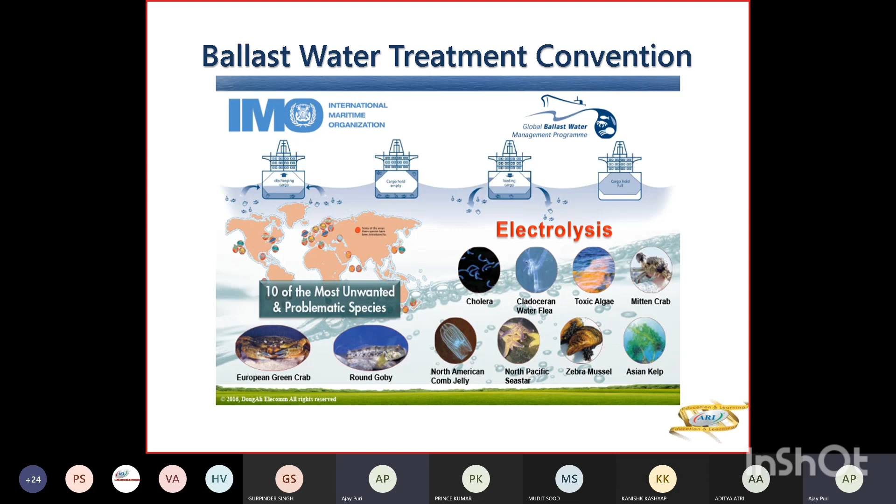Now, 10 billion tons of ballast water is being exchanged with chemicals, invasive species, and 10 billion gallons of sewage is discharged annually, and 3.25 million metric tons of oil is annually discharged, and so many millions. So the water of the sea is getting polluted all the time, and we have control of sewage by Annex 4, we had control of oil by Annex 1, chemicals by Annex 2. So what about the ballast? That's why the Ballast Water Treatment Convention came up.

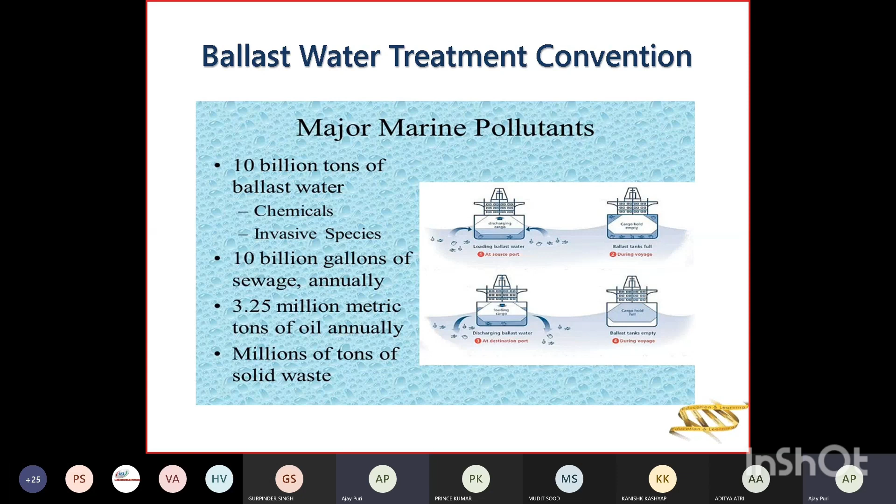So ballast water, why you require it? You require it for your trim and stability because you're discharging. So you are pretty light. So for better stability, you have to take ballast. And then if your trim is too high, maybe 5 meters, then you have to take ballast. So your ballast will have water, stones, and sediments and living organisms coming through the suction pipe.

And about 12 billion tons of ballast water is transported annually. The ships carry about 1 lakh to 100 lakh gallons of ballast water. So with this ballast water being carried, about 7,000 plus marine species are transported daily from one place to the other place. And every 9 weeks, a new species is introduced in the world.

Now, Great Lakes are 5 lakes in Canada and US. They are made of fresh water. And you enter the Great Lakes through Montreal by various locks, about 12 to 13 locks are there. So the ships which go there normally, the normal vessels which are there are known as lakers.

So about 160 plus non-native species have entered Great Lakes, and they are destroying the ecosystem there. And 5 billion estimated economic impact is of zebra mussels over the next decade. So you can understand what is the outcome of these ballast water organisms which are creating worldwide.

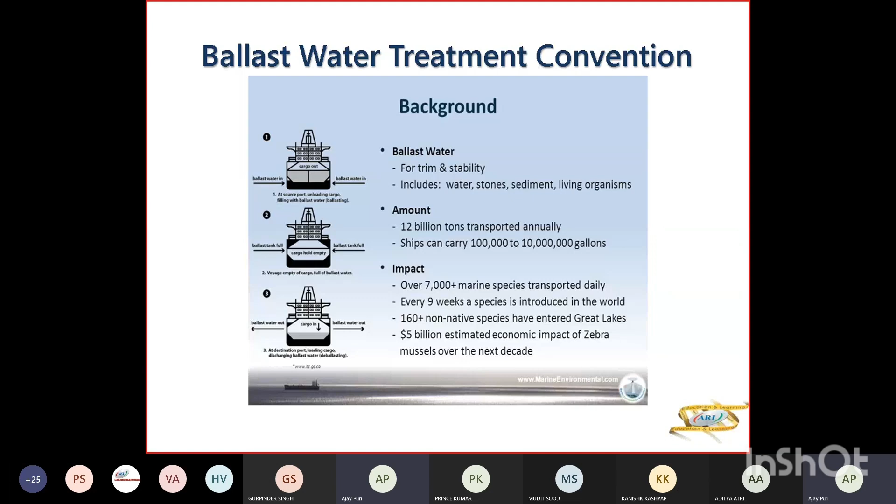So you had a D1 convention. The D1 standards were to exchange the ballast water in the open seas away from your coastal areas. So 95% of the organisms were changed. But what about the 5%? So the D2 convention came up. There's the D1 standard of exchange. The D2 standards have to be complied by 8 September 2024. All ships.

So the D2 standards were specifying the maximum amount of viable organisms, not visible, viable, because you can see only in microscope. Viable means living, which can be discharged. Beyond that, you have to do the treatment. So within the treatment, the number of cholera bacteria, enterococci bacteria, those standards are given there. So all new ships must conform to the D2 standard.

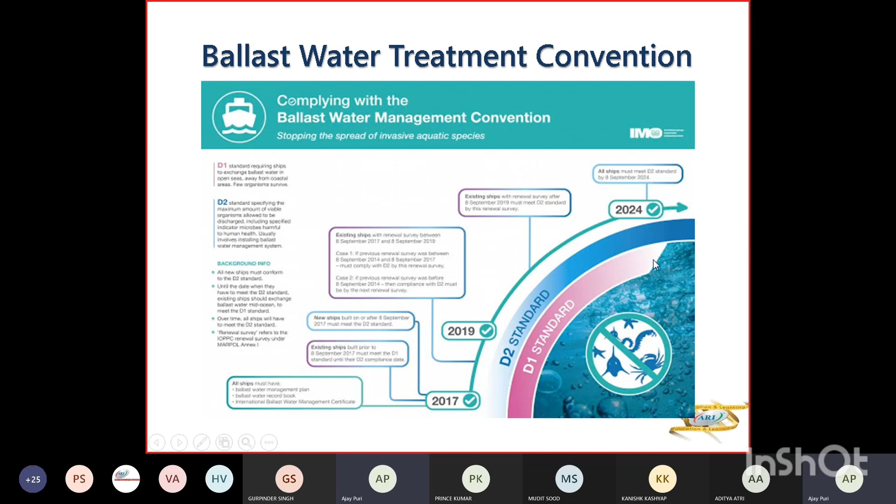Now, in order to reduce your damage from aquatic invasive species, what are invasive species? That means they enter that area, destroy the ecosystem there, destroy the fishes there, and invade the territory. You know that there is a saying that every dog in the street is like a tiger. So if any other dog tries to go into that territory, the dog in this area is going to bark him away.

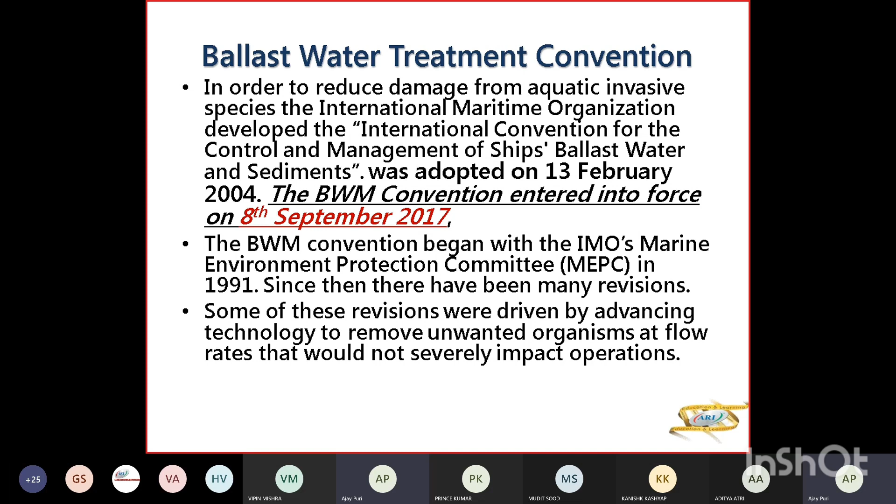So IMO approved Marine Environment Protection Committee, जो MEPC है, approved a resolution containing a revised implementation scheme so that they comply with the D2 biological standards.

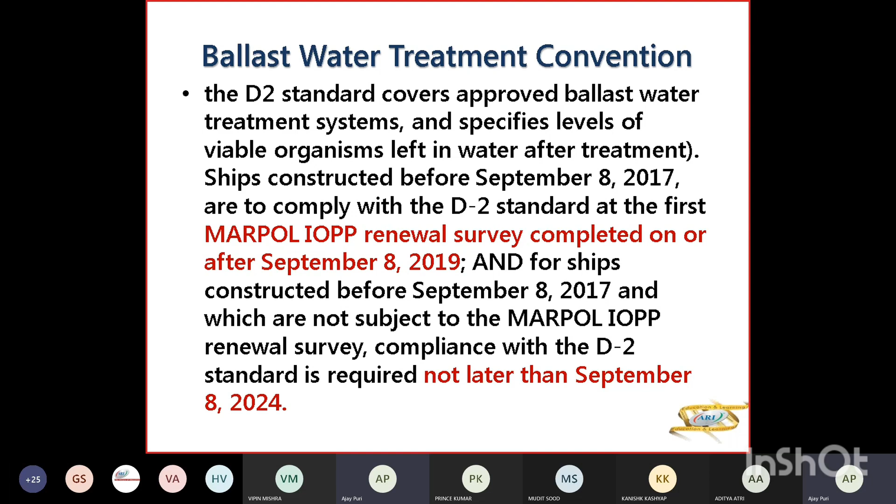So new ships must comply with D2 standard. New ship means built on or after 8 September 2017, and they have to conduct ballast water management that meets the D2 standard from the date the ship is put into service.

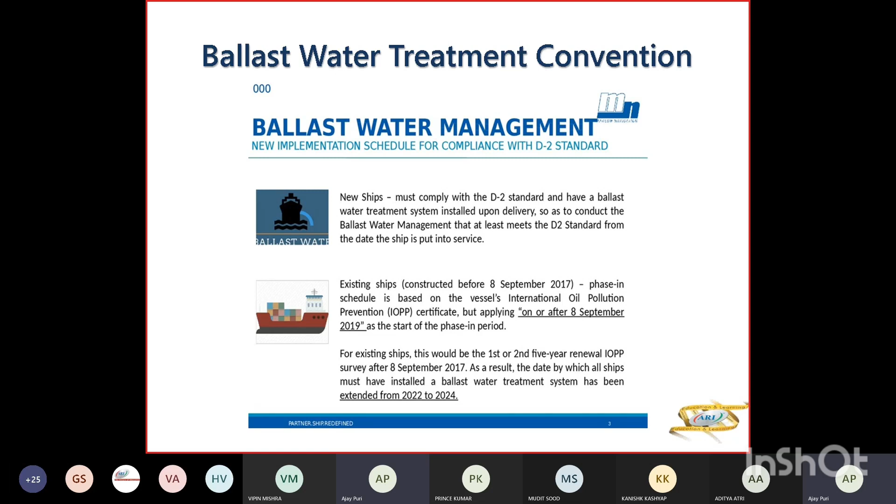So for existing ships, this would be first or second renewal survey after 8 September 2017, and the date for all ships has been extended from 2022 to 2024. So finally all ships have to have, by 8 September 2024, the ballast water treatment that is D2 standard.

D1 standard you already know. D2 standard specifies the amount of viable organisms discharge, including the specified indicator microbes harmful to human health.

These are usually installing ballast water management systems.

About 7000 species come daily, every hour, into ballast water, and this is affecting 2.4 billion people, and one new species is introduced every 9 weeks into an area, and 80% of world trade is carried by ships.

So this tells you that all ships must meet D2 standard by 8 September 2024, and all ships, as per the ballast water convention, must have a ballast water management plan, a ballast water record book, and an international ballast water management certificate.

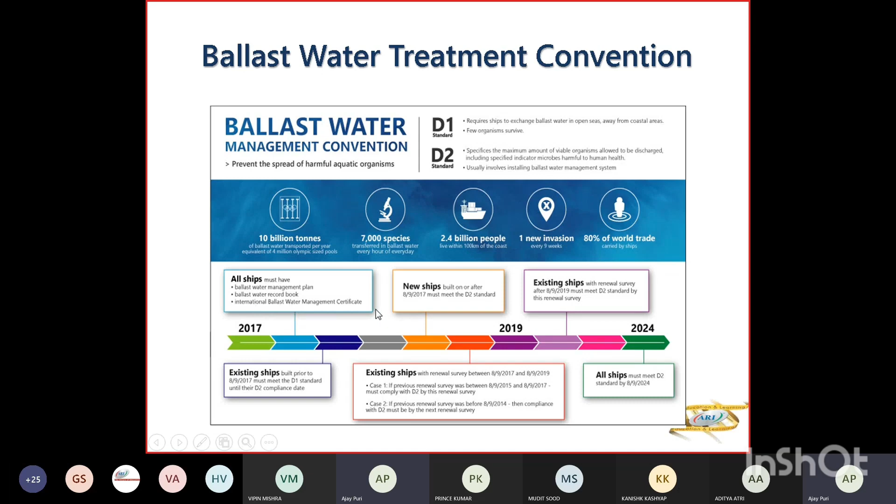So what is your D1 standard? D1 standard is basically ballast water exchange.

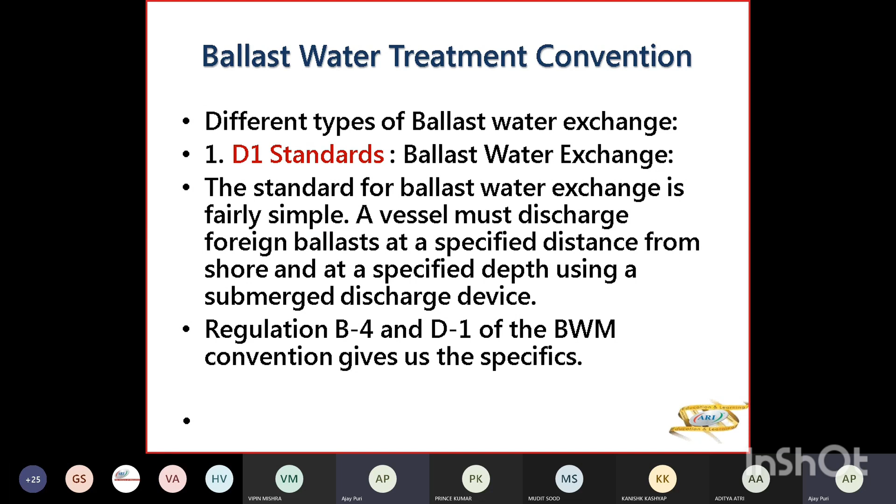You have to discharge ballast at a specified distance from shore at a specified depth, and for this, your exchange should be either done in mid ocean or at least 200 nautical miles from shore, and at this location, the depth of water should be 200 meters or more.

Now, when your exchange is there, it should be at least 95% of the volume, and it should be repeated 3 times. And the vessels must demonstrate high efficiency exchange to reduce the number of exchange cycles.

Ballast water exchange should be taken only when weather is good, because you can't do it in rough weather. Otherwise the safety for the crew will be lost. You can't keep the crew in danger if you are doing ballast water exchange.

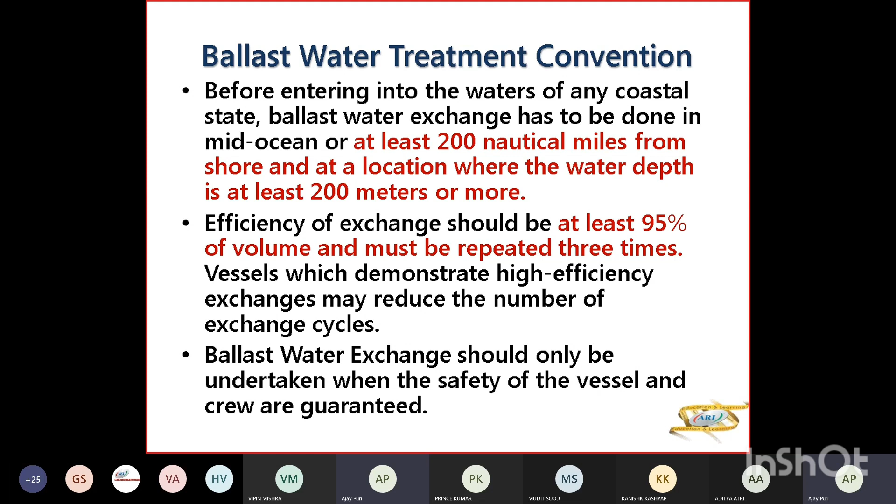But suppose this scenario of 200 nautical miles, 200 meter depth, is not possible. Then you can ask the port state to advise which area they designate for exchange.

And when you're having this kind of exchange, the port state should not deviate or delay the ship. They should not say you go 500 nautical miles here and then discharge. They should not delay and cause a deviation for the ship.

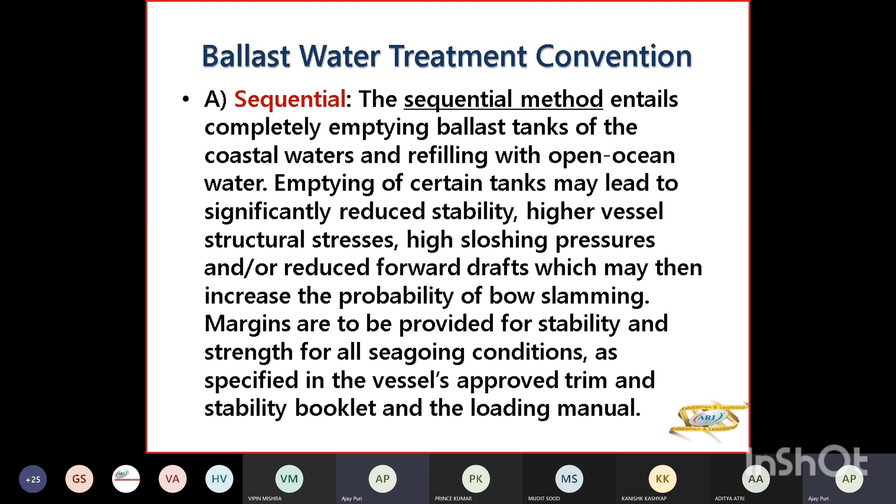When you reduce forward draft, it will increase your bow slamming and pounding. So margin has to be provided for stability and strength for all seagoing conditions, as per approved trim and stability booklet, loading manual, and load indicator. You cannot exceed your stresses in any condition.

Sequential is discharge and refilling of your tanks. Flow through method is filling and overflow, that is you are filling the tank from below and overflowing from the top. Dilution method is pumping out water from below and putting water in the tank from top with hoses.

So one is your sequential method where you're completely discharging and then completely filling your tanks, which is the most dangerous one. Most precautions need to be kept there.

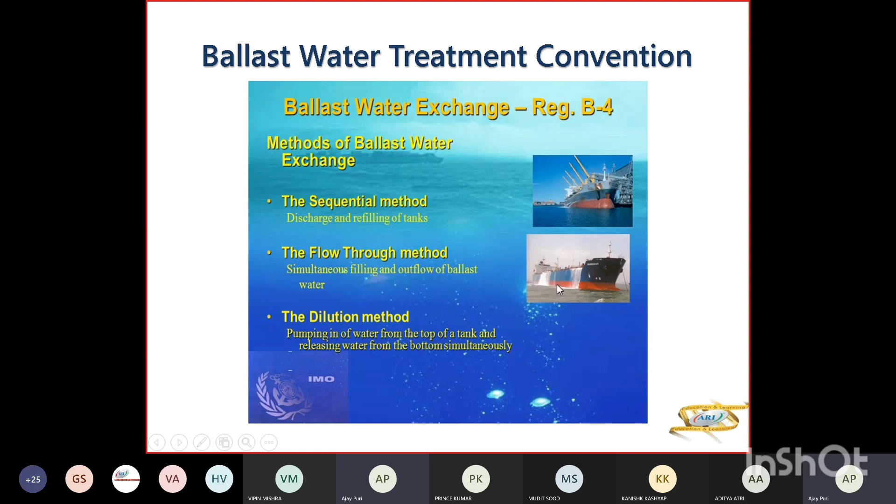Flow through method is the one you see in the photograph here. You're filling up your ballast tank, taking suction from below, and overflowing your tanks by 3 times the volume of your tank. Dilution method is not overflowing; you're taking the water in the tank from top and pumping out from below at the same rate.

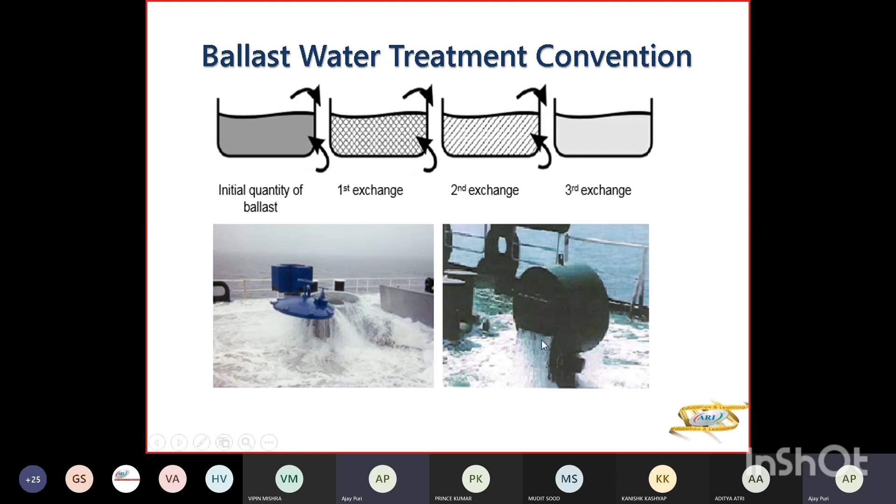So this is your overflow method, which you normally do on your ships, or flow through method.

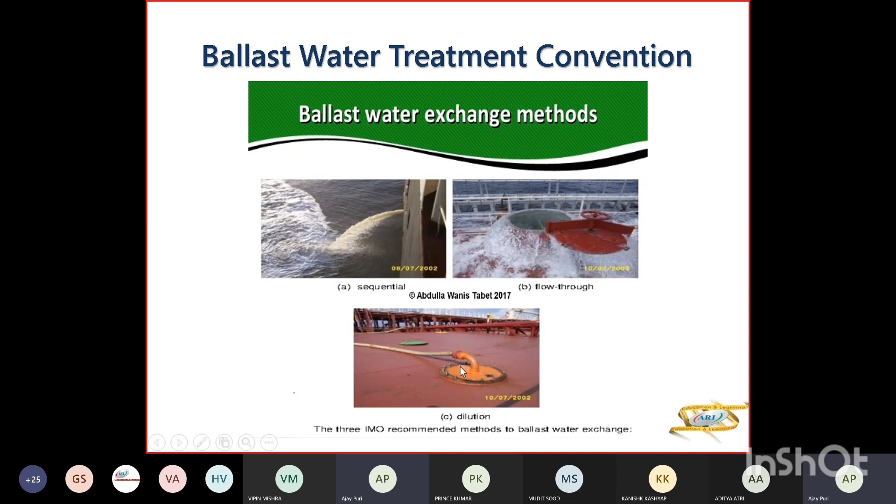This is the flow through method. This is your sequential method, you are pumping out and then pumping in. Flow through method is opening all your tank domes and overflowing from that. Dilution method is taking the water from top, pumping out from below. So you make adjustments on how to take the water from top, and the rate of taking in water and pumping out should be the same.

Now what are the disadvantages in this ballast water exchange? The operation is very laborious, a lot of people are involved, and you see here you're overflowing in very heavy seas, and it can break up your ship because the fatigue limit will be crossed and the ship can sink.

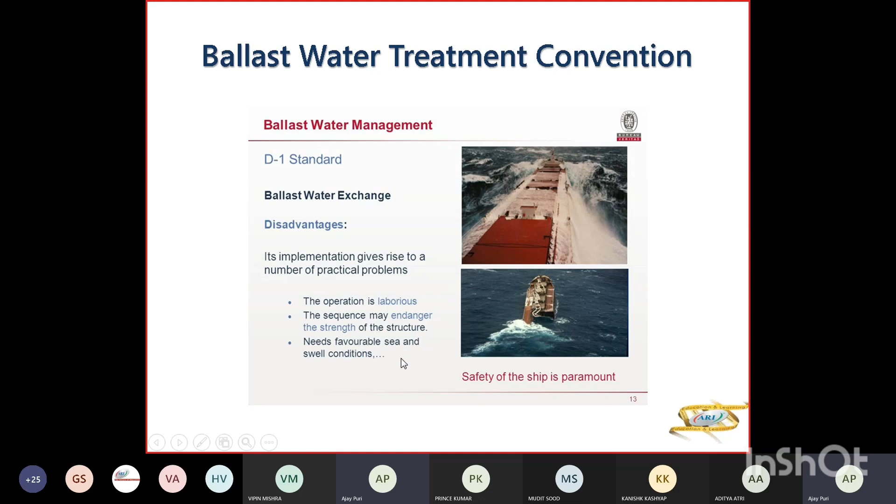So your safety limits have to be taken into consideration. The sequential method may endanger the strength of the structure and needs favorable sea and swell conditions. Otherwise, we should not do it.

Now this has come in your exams several times: what are the ballast water exchange precautions to be taken? Because you can't just start your ballast water exchange without considering all these things. First is avoidance of over-pressurizing or under-pressurizing your tank.

Whenever you over-pressurize the tank, that means you're overflowing it. The pressure on the tank, the water head on the tank, is creating a lot of pressure on the tank. So long-term effects on the strength will be known afterwards - cracks will appear there.

Number two is your free surface effects will have an effect on stability, and sloshing loads on your tank which are slack at any time. And whatever your admissible weather conditions are - are you going to have a storm like we had, severe tropical storm, extremely severe tropical storm, which hit Gujarat yesterday. In these kinds of conditions, you can't think about it because then you are going to lose your vessel and you will not be there.

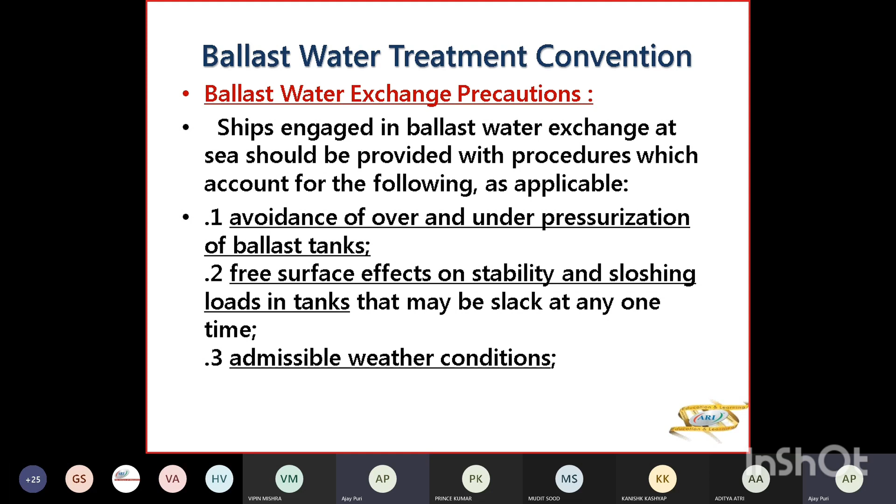Number four, you have to do weather routing in the areas affected by cyclones, typhoons, hurricanes, and heavy icing conditions, because here you can't have your ballast water exchange.

Number five, you have to maintain adequate intact stability as per approved trim and stability booklet.

Number six, your bending moment and shear limit should not be exceeded, or you should not have the stresses going beyond your limits. You have not to stretch your limits. So suppose there is a limit for your bending moment and shearing stress, you cannot exceed it. You have to be within the stress limits. So for that, if it is exceeding, then you have to stop.

For container ships, you have to see the torsional forces also because they can break away your containers. Then eighth is your maximum minimum forward and aft drafts - for your stability you have to maintain, you can't exceed those limits.

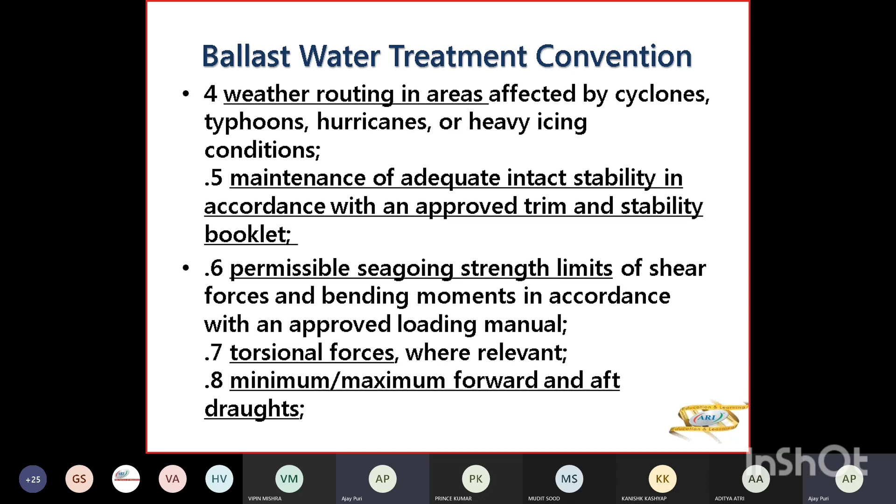Number nine, whenever there is a heavy wave, you will have a huge vibration on the hull, which we have covered in vibration stress. So there you have to see your wave-induced hull vibration does not exceed the limits to cause resonance.

Number 10, precaution: you have to maintain the records of ballasting and deballasting. How much time when you're starting, when you're stopping, how many times you're doing it - 3 times and all. That you have to monitor. The records have to be maintained.

11, contingency procedure for situations which may affect the ballast water exchange at sea. Like if you have very bad weather, or maybe a pump failure - you started and now you have a pump failure, now what will you do? Or suppose you've started off halfway through sequential exchange, now you have loss of power and the generator is conked off, now what to do? Because the ballast is half or maybe less than half, or you're completely empty, now you can't fill it in only. So what kind of contingency procedures or plan will you have for that, so that you can counter it?

Number 12 is the time for completing a ballast water exchange. So you have to see how much time it will take for completing your exchange.

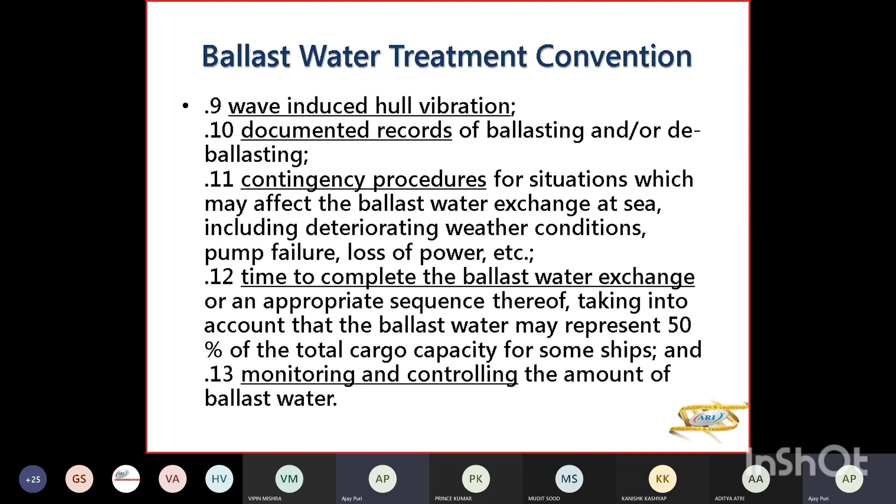So the first method we have already done, and these were the precautions for the first method.

Now flow through method involves pumping replacement ballast water into the bottom of the full ballast tank, forcing existing ballast water through the overflow or any other arrangement of flowing out.

In the trials, they have seen that overflowing once will not help out, because the organisms will be sticking to the underside of your deck. So they said, okay, by pumping out at least 3 times the volume of your tank, you will achieve 95% effectiveness in eliminating aquatic organisms. So 5% might remain, 95% will come out if you do it 3 times.

But in flow through, your stability will not be affected because you have the same amount of ballast water.

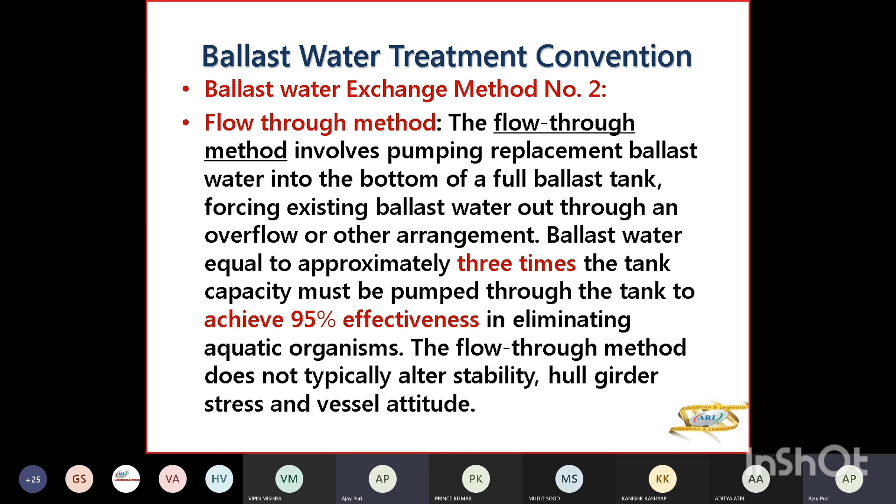So what are the precautions to be taken for number 2, the flow through method? In this, overpressurizing will be there in your tank. Your air pipes are not designed for continuous ballast water overflow because that is only for releasing air, not for water. So if you are continuing ballast water exchange for so many years, it might put a lot of pressure on the tank. Structural damage might occur in the long run.

Number 2, current research indicates that pumping at least 3 full volumes of tank capacity would be needed for effective exchange when filling clean water from the bottom and overflowing from the top - you will require 3 full exchanges for 95% effectiveness of removing aquatic organisms from your ballast water.

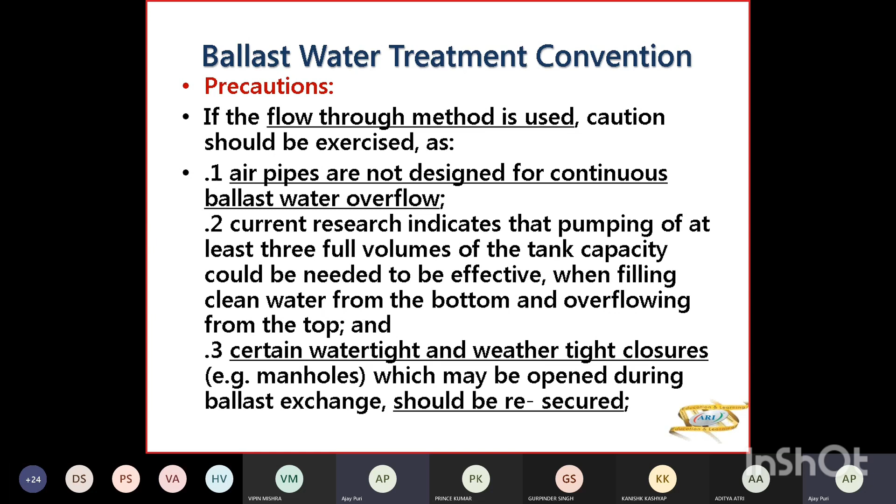Number 3, when you're opening all your watertight and weathertight closures, which are the manholes, for ballast water exchange, you have to close every one, all the manholes, otherwise you will have a problem. So you have to remember that you have to close all your manholes.

Then another thing is, when you're doing ballast water exchange, you'll have a lot of water on deck and somebody might slip. So your safety wires need to be rigged so that nobody falls on deck. Then you can have a problem of somebody falling inside an open manhole because there are a lot of open manholes on deck, so those safety precautions have to be taken. And if you're doing ballast water exchange at night, it might disturb your navigation also.

Then in freezing conditions, you should not do ballast water exchange unless absolutely necessary, because your air pipes and all might crack up, and you will have a lot of ice on deck because you're doing overflow. That ice is going to put a lot of stability issues, increasing your stability concerns because of the weight of ice accumulated on deck, so the stability might get affected.

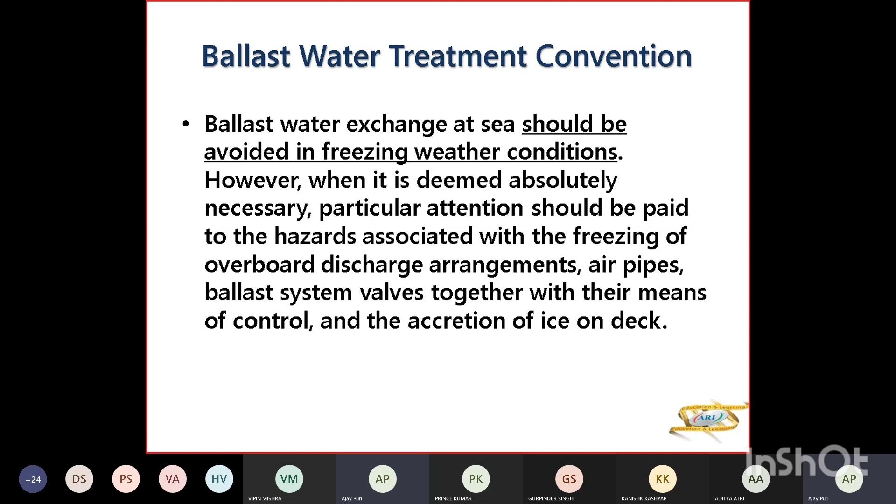Plus you have to fit load indicators to perform calculations of shear force and bending moments as induced by ballast water exchange at sea, and bring it below your permissible strength limits. You can't increase your fatigue limit at any time because that will crack your vessel.

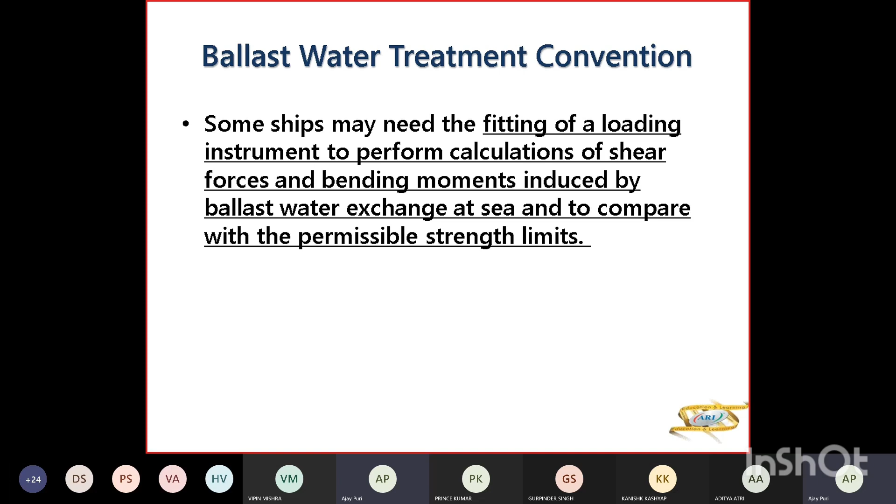Now we do number 3, that is the dilution method. In the dilution method, you are taking the ballast water from top, pumping out from below. This you have to do 3 times, 3 times of your tank volume, to achieve 95% effectiveness, and you have to see that the pumping rate inside the tank is the same as the pumping out rate, because you have to maintain a constant level in the tank. So you are filling from top, simultaneously discharging from bottom, maintaining constant level.

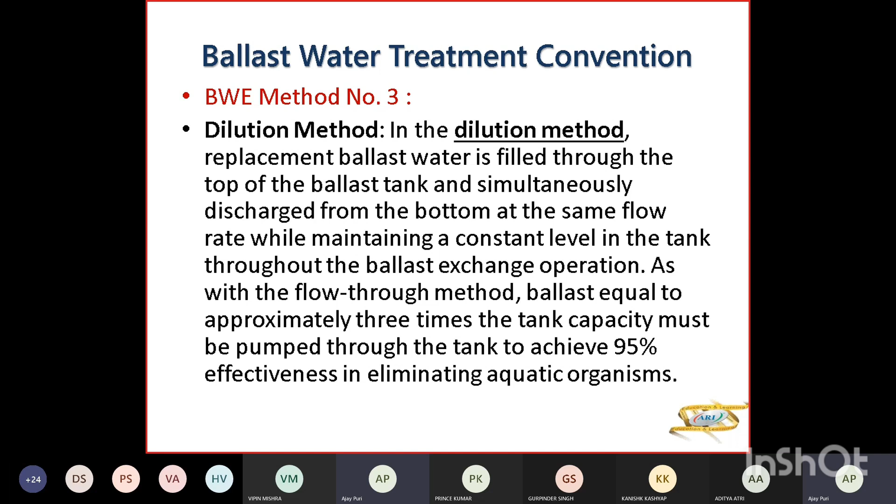And ballast equal to 3 times the tank capacity must be pumped through the tank to achieve 95% effectiveness in eliminating aquatic organisms. Now the dilution method has better advantages than the flow through method because you are not overflowing and putting pressure on your tank. So you're maintaining stability and strength, but the problem is you are using 2 pumps, not 1.

In overflow, you are using only 1 pump, pumping in and overflowing. But here you are using 2 pumps. One is pumping in from the ballast pumps or fire pumps or other pumps or tank cleaning pumps, and pumping out from ballast pumps. So 2 pumps are being used. Fuel utilization will be more, wear and tear of the pumps will be more.

But the advantage is nobody is slipping on deck, your manholes are not open, and at the bottom of your tanks, the sediments will be totally removed. All your ballast tanks will be absolutely clear with this, because the sediments in the ballast tanks are totally washed off in this method. So it avoids the use of air vent pipes and removal of manhole covers to discharge water over the deck.